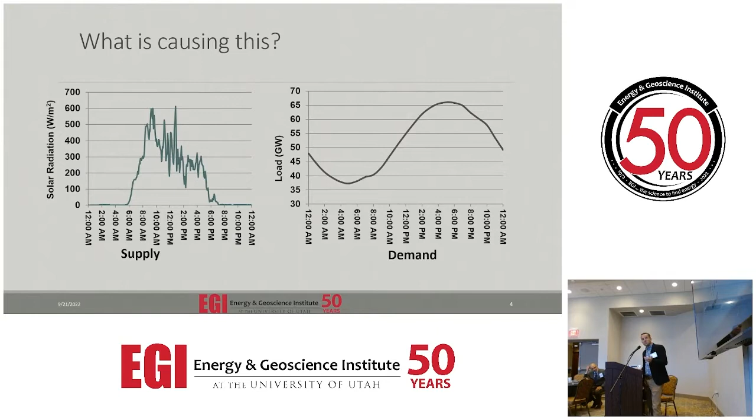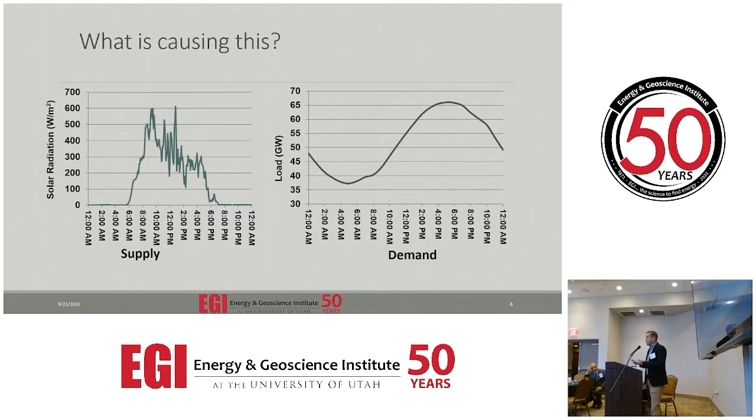If we compare that energy supply to the energy demand, this is also data from the state of Texas. This is over a 24-hour period. You're seeing even demand itself fluctuates quite drastically, and this was a fairly extreme day, I will admit. So we have this really unique challenge when we're trying to pivot toward renewable energies in trying to make the supply and the demand line up in a way that we can still maintain our way of life.

So how would this impact your business, all this climate that we're facing? So certainly by improving your energy efficiency, that can impact your bottom line. I'm sure you've heard the term ESG: environment, social, and governance. A lot of companies are adopting these new kind of governing principles for their company where they are portraying themselves as not just being out there for profit, but trying to be a good steward of the environment. Renewable energy integration is certainly important.

Decarbonization is language that we're hearing a lot more from the federal government. But then really, you want to know how this impacts the way your company operates. Certainly everyone wants to be a good steward of the environment and of our society, but we still have to find ways to make all of this work within our existing market.

So here's how EGI can help. So my working with EGI represents EGI expanding or broadening its base of technologies and services that it provides. So I run a center from the Department of Energy that provides no-cost energy assessments to companies. So we can bring in a team of professionals and well-trained students to come in, survey your facility. We can look at different energy projects that you're interested in, and we can run some engineering and economic calculations for you to see not only how those would impact the environment, but also how those would impact your savings and your revenue streams.

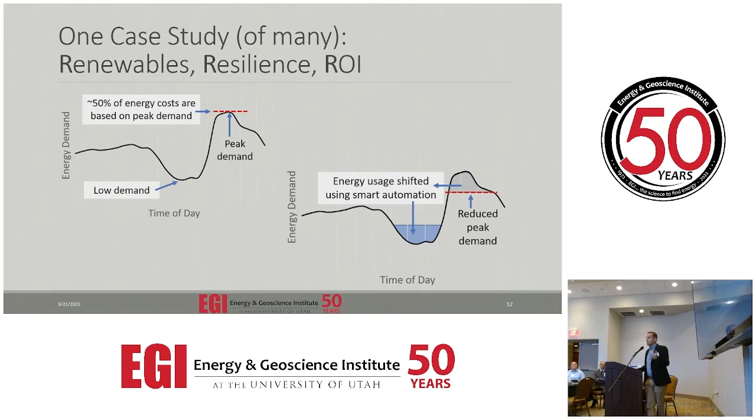financial benefit for them. So this particular company, I want to mention we're not supposed to divulge the names of the companies that undergo these assessments. So this was a mineral processing facility in eastern Nevada, and they are mining, they're pulling up minerals, they're running a processing facility. What they're doing currently is they're dewatering because they want to keep digging deeper in their mine.

So they're dewatering. They recycle that water and pull it up into large storage; they have a total of 6.2 million gallons of water storage. So they use that water storage to feed their process, and they're using that water for the minerals processing part of things. Each of their wells is equipped with variable frequency drives on their pumps. However, what we discovered is that they're keeping those pumps maxed out at 100% all of the time. So while they have VFDs, they're not really utilizing the full flexibility that VFDs would offer.

They wanted us to come out and do an assessment of a big solar project. So we mapped out and modeled a 6 megawatt solar farm because they had that ESG drive from their company. This is a European company. So we modeled this solar farm. We also looked at their real-time energy usage, and these are the results that we got.

I didn't realize it might not. I hope you can see the yellow line on there. So the blue line is the power demand that they're currently experiencing. So this is over a period of about a week. The yellow line is how that would look if they installed this 6 megawatt solar farm.

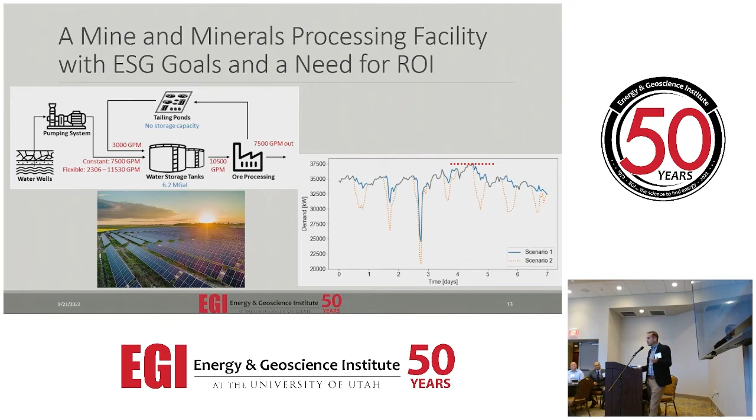And really the solar almost becomes a burden on the grid in some ways, where you still have times where you need to have a lot of energy throughput, and even though solar would be a distributed energy resource, it's not helping them particularly. So the natural conclusion would be they should install a battery system so that you could store that excess solar energy when it's available, and then use that battery system to draw down your peak. And that is a fine idea.

A battery system for them at the size that they needed, I think we did a 2.5 or 3 megawatt battery analysis coupled with their solar system. The battery itself would cost about $3.6 million. One thing that we told them was, hey, you already have storage at your site, and you have the ability to make your system flexible the same way that a battery system would make your system flexible.

So what we pitched to them was you could actually run your pumps, pump more water out during the low energy demand times, then you turn your pumps down as you're approaching your peak, and effectively you're using existing capital equipment that you already have to bring down your peak. I wish projects like these would get more attention, and that's what I'm pushing for.

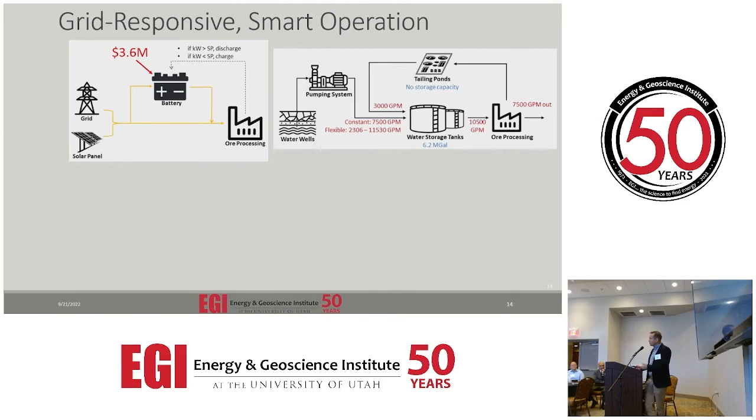I don't think we need to be spending as much capital as we're proposing to spend when our industrial facilities already have a lot of existing flexibility. We just need to be smarter about the way we use it. So we ran the analysis, we simulated this system, we found that they could reduce their peak by just as much as the battery system would reduce it.

But really the only cost you need is going into your automation system. So you may need some new sensors, you may need some new software, you may need some new actuators to make all of this happen. But you really need to put in some intelligence behind this. So you'd need a way to predict when those peaks are going to happen so that you know when to charge and discharge.

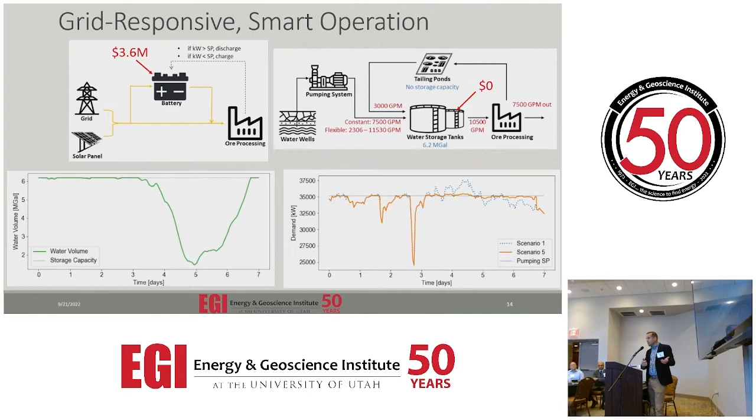And then naturally, this does impact your process. So we designed and simulated a control system for them that would maintain a margin of safety in their water storage so that they would never be putting their process at risk. So we do the financial analysis as well as the engineering analysis. We ran all these different scenarios for them.

So business as usual, they're pulling about 36 megawatts at their peak. The solar farm doesn't really help, and this is over the period of a year. So the solar farm just nominally reduces their peak demand, but it comes with a large cost of $7.6 million. So the solar farm would save them $270,000 a year. That's a 28-year payback, which if you know about solar panels, you're probably going to need to replace your whole entire solar field before that happens.

If they install this scenario here, looking at a battery system, the battery system lets you drop your peak demand charges substantially. That brings your capital costs up even higher, so $11.3 million. But now you get a much better savings, and so your payback drops a little bit to 17 years.

The system that we proposed to them, if they use this smart pumping concept coupled with solar, they would drop their peak substantially. They'd still get all the kWh savings from the solar. That would give you the maximum savings of $750,000 a year, which would be about a 10.5-year payback.

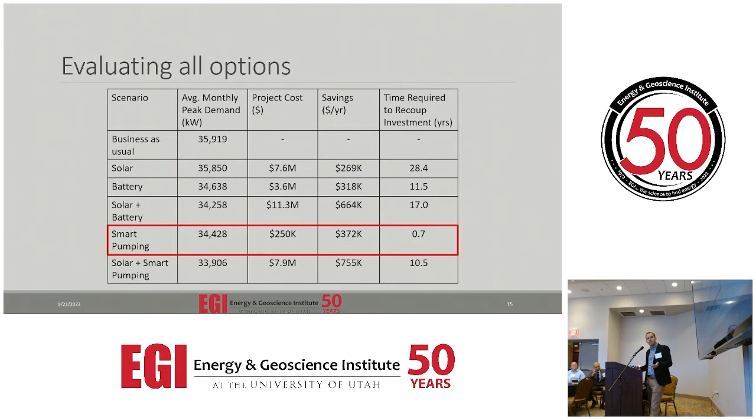But really, if you just took out the solar farm entirely and just did this smart pumping concept, there's still quite a bit of financial incentive there just by minimizing your peak demand. So that one is less than a 1-year payback, and really this $250,000 project cost is, I think, conservative because you just need software and you need expertise. You need to tap into some of the AI and optimization algorithms that are out there so you can predict these things well.

Yeah, no one may get too excited if they're not seeing the big shiny solar panels out there, but I think we need to do a lot of work collectively to highlight the low-hanging fruit that's already out there and trump these projects up so they get the attention that they deserve. So you're not just getting financial savings, but you're getting that ESG credit that you want to get.

And in my mind, a project like this, if you set this up so that it was interactive with your utility, you could be doing a lot of load balancing for the utility by just using this existing asset. So that's one way that we're trying to drive the research in this direction, and we think this program nationwide could have a tremendous impact on helping to balance and maintain reliability with the huge proliferation of intermittent renewables that's happening.

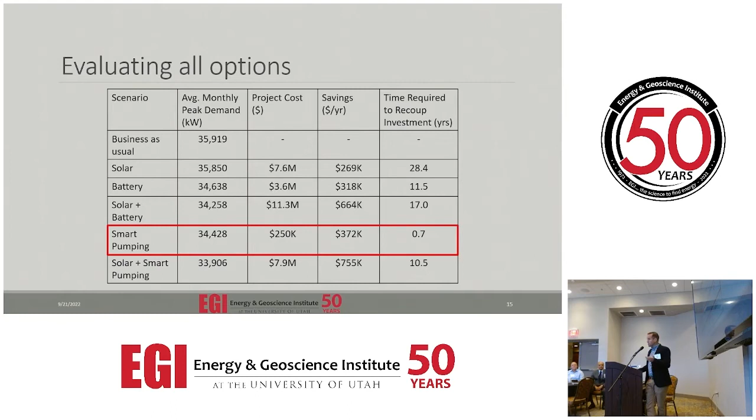So the other way that we think that EGI could help is by partnering on collaborative projects. So here's a separate project. This was a fun one as well. We partnered with our local power generator, PacifiCorp. We installed AI-based optimization software at this power plant. We partnered with a third-party software vendor. I had my graduate student spend a lot of time at this facility. This is the Hunter power plant, for those of you that heard it mentioned earlier.

So we partnered with a software vendor to do this project where we installed AI-based optimization software that, quote-unquote, learns the input and output relationships between nearly 100 different decision variables that operators have to make. And we would map those decision variables to our output. In this case, we were targeting NOx emissions. So this software learns the relationships between all those different inputs and the output of NOx emissions.

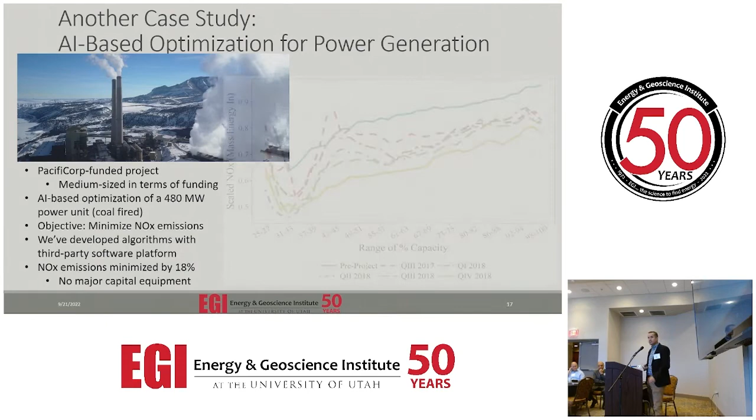And over time, as it learns and the models get better, it starts taking action and it starts solving and optimizing in real time so that we're minimizing their NOx emissions. So over the course of this project, this is how we saw their NOx emissions drop. On the x-axis is the range of capacity for the plant, going from 25 up to 100. And then on the left, on the y-axis, is the scaled NOx. They don't want us to disclose the actual numbers.

Over the course of this project, this was about 18 months, we were able to reduce their NOx emissions by about 18%. As mentioned, these are old plants. They don't want to put in hundreds of millions of dollars. This project was in response to an Obama-era mandate that these plants needed to install selective catalytic reduction technology, which I think was about $250 million for each plant. Well, we came in and we did this software project, and we were able to substantially reduce their NOx just by being smarter about the way the plant is operating.

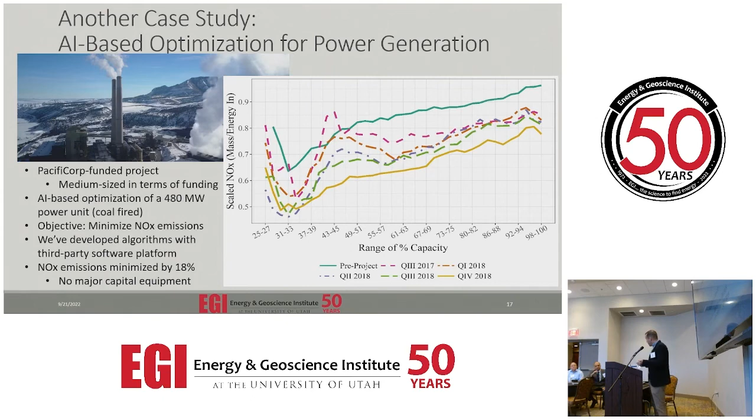So this was funded by PacifiCorp. It was a medium-sized project. What we did was we took the results and our historical successes from this partnership, and we applied for a bigger grant from the Department of Energy. This one was focused on tackling that idea of the world just being a lot less stable. And so the power plant in these years between 2016 and 2019 entered the California Energy Imbalance Market. So the value proposition for this power plant became more their flexibility rather than their ability to produce baseload power. So you can see going from 2016 to 2019, the loads on this power plant started fluctuating a lot more.

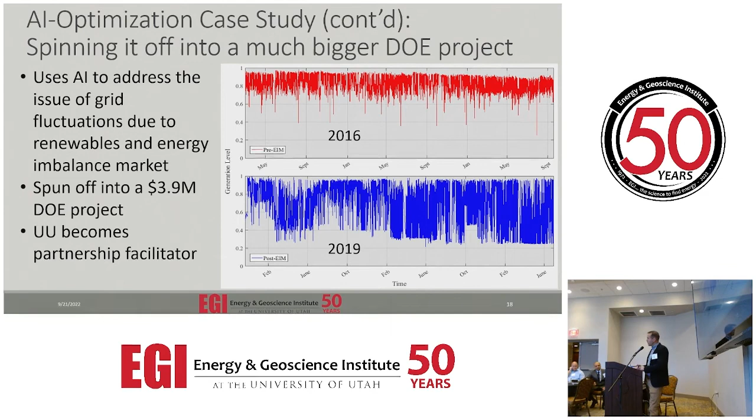So our project, we spun this off in partnership with the Department of Energy. Our project is trying to transition the way that the AI technology works, whereas prior, this neural network optimization functions as a steady state optimizer. So even though your load is fluctuating, you'll run your model here, you'll solve for the optimal conditions that will lead to minimizing heat rate in this case. But by the time you've implemented that solution and you're holding that solution, the power plant has moved.

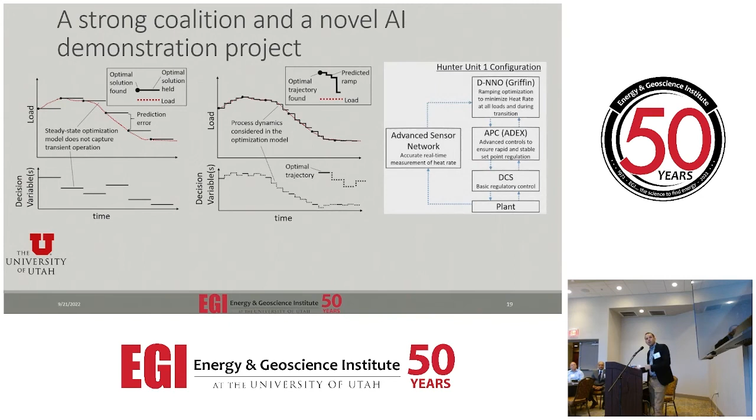So the new technology that we've been developing is to do what's called dynamic optimization, where we're using our AI models to forecast where the plant is going, and we're building into the optimization all the moves that the power plant needs to make as it follows load from point A to point B. So we have this partnership where it's not just the University of Utah, but we've partnered with 3 companies and a total of 3 universities to make these kind of projects happen.

So I illustrate that project because we think that EGI can help you and your companies. We can start with an energy assessment, we can do targeted studies for you, but really we hope that these projects spin off into something much bigger where we're partnering together to get some of those big federal dollars that are out there. So these are the 3 ways that I think your company can engage with EGI. First would be get an energy assessment, you can work with us on targeted projects, and then we can partner with EGI on large federal projects.

So there's some big funding opportunities out there right now, like a $3.5 billion total for direct air capture hubs, $8 billion for hydrogen hubs. So those hydrogen hubs are going to be on the order of about $1 billion each. EGI is engaging with a 4-state coalition to apply for a hydrogen hub, but we are actively seeking industrial partners out here who want to do hydrogen projects, for example.